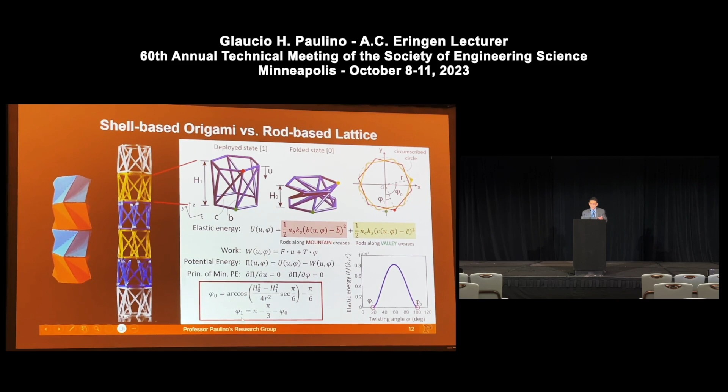When I plot this energy versus the twist angle, we can see the stable configurations are here, and the energy is 0 at this minimum point. But when I talk about frustrated states later in the talk, halfway through, we'll have frustration and pre-stressing in the system, and the energy level at the minimum points will not be 0. We can do calculations and find what these angles are, as shown here.

Then we can program the instability by playing with geometry and material — sometimes we don't even know the difference between geometry and material. We can see here that we can play with the Kresling pattern in terms of polygons that have 4 edges, 5, 6, and so on.

To make this like Legos so you can play with it, we put small magnets here so they can easily connect to each other. When I put them together, they have to satisfy this compatibility condition so each piece can be assembled. If we look at the energy versus the twist angle, we can see that the lower the number of edges, the higher the energy barrier.

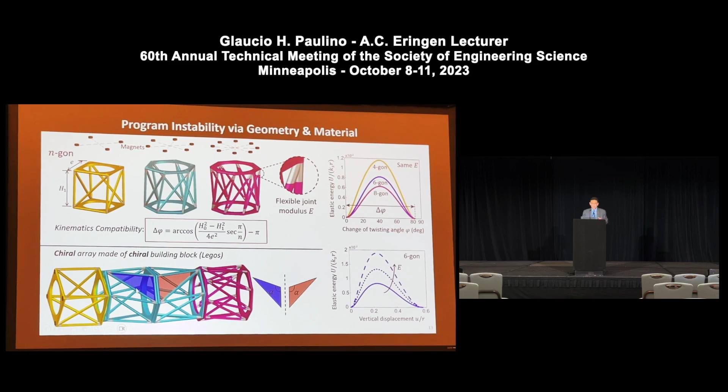And if I keep the geometry and use stiffer materials, then I have a higher energy barrier. And when I put them together, I always make sure that when they are joined, I have opposite chiralities, as you can see here.

We designed this using a gradient-based min-max topology optimization, and the objective shown here is the minimization of this quadratic function, where we minimize the difference between the desired state and the calculated state. The design variables are the cross-sectional areas we are going to design, and we have a volume constraint.

In general, most topology optimization work, and Professor Wei Chen has contributed a lot in the field, is based on density-based methods. But here, since we are using a rod-based method, we did this using a ground structure method. Essentially, we have a design domain with many points, and we connect each point with every other point and have a truss member there.

Then the optimizer will remove most of them, almost all of them are not needed. The optimizer will remove almost 100% of them, 90+%, and at the end, if things work, I will get a configuration like this that will work.

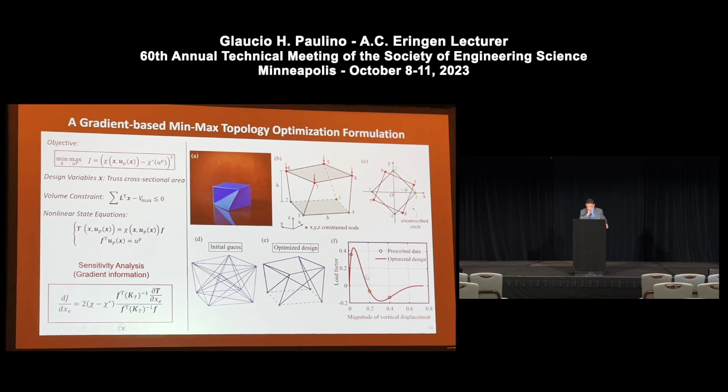And essentially this min-max configuration is done by means of some prescribed data, prescribed behavior that I want. I want to program the material to behave that way with these points, and then the optimizer is going to give me a potential result that will have this nonlinear behavior that I'm looking for.

And then I can play with geometry and material. For example, here I'll keep the material the same, just change the geometry. The first two here have 8 sides, then 6, then 4. Just remember, the lower the number of edges, the higher the energy barrier. Therefore, the middle is going to buckle first, as you can see here.

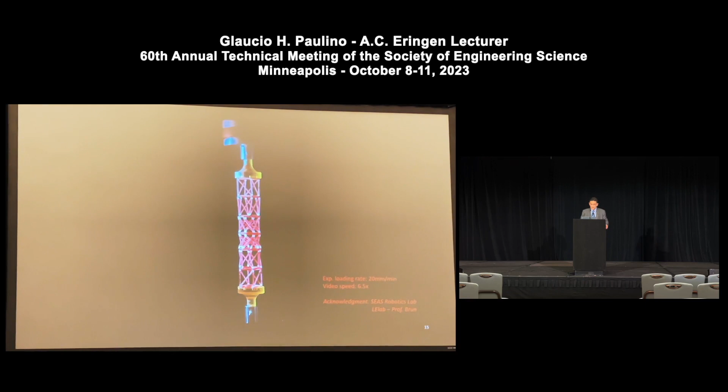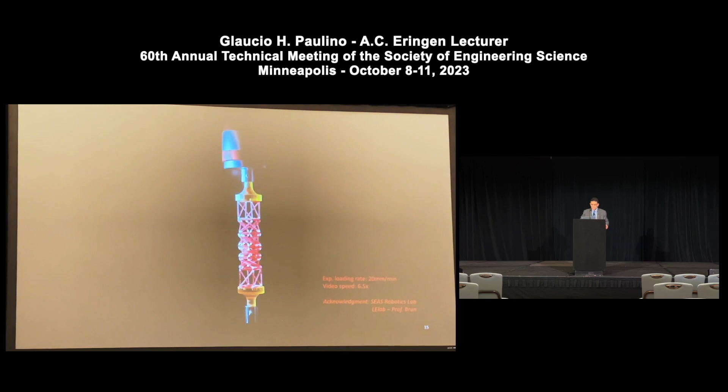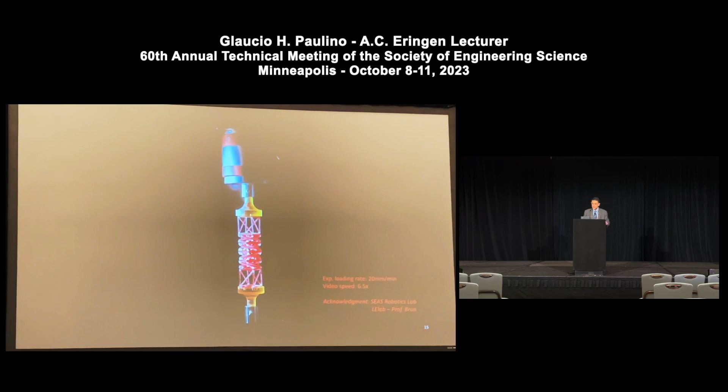And then the next two, that are the 6-gons. And finally, the 4-gons. So here, the material is the same — we just played with the geometry.

And then now I can keep the geometry the same, for example, and use different materials. And then I can design different load displacement landscapes and different multi-stability configurations, as you can see here.

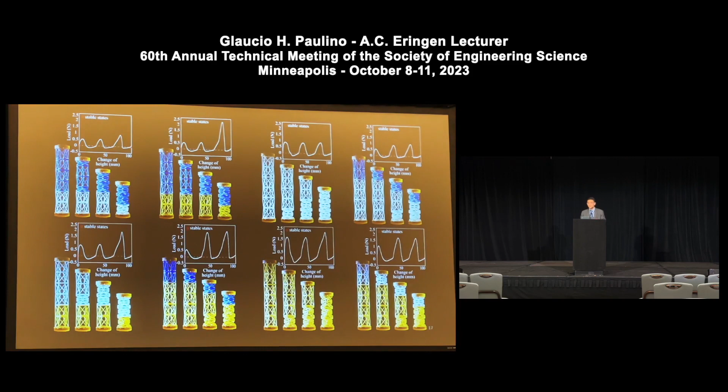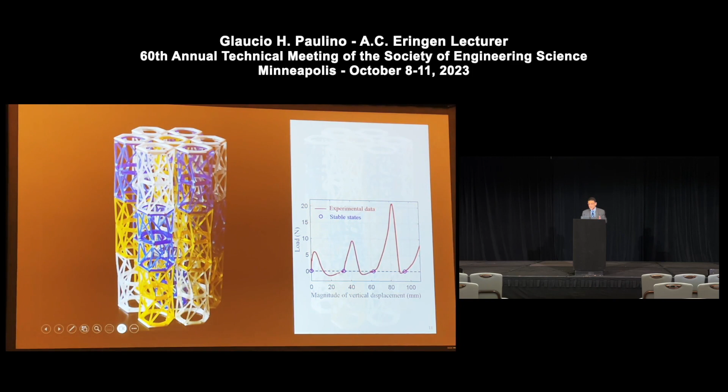But everything here is 1D. If we are claiming there is metamaterials in the title, then the materials have to have a three-dimensional feature, and then we can assemble this, for example, in 3D, as you can see here, and we would get some multi-stable behavior, as you can see on the right.

And here, what happened is we have three colors, three different materials. The blue is the less stiff one, then the white, and the yellow. Doesn't matter where I put them — you are going to see that first the blue will be activated, and the others wait, and then after the blue finishes its job, we go to the next one.

And then you can change this as you wish. Actually, when children come to our lab and play with this, they love it because it's very nice to play with this.

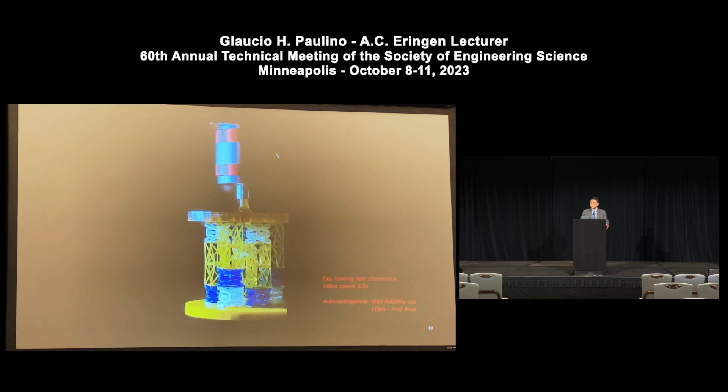Origami is good for everybody, not just us — children, adults, and also it's very good for me because when I retire, then I will have something to do.

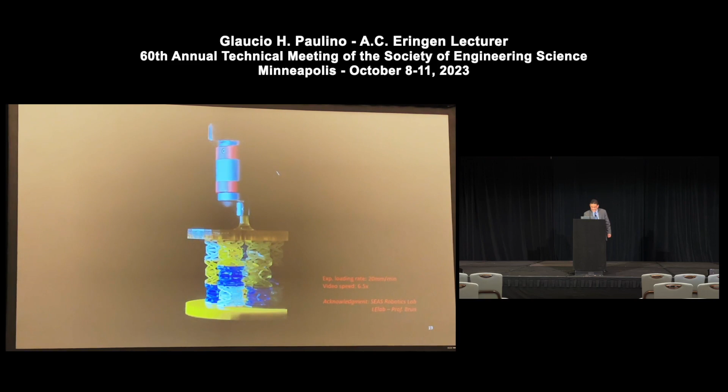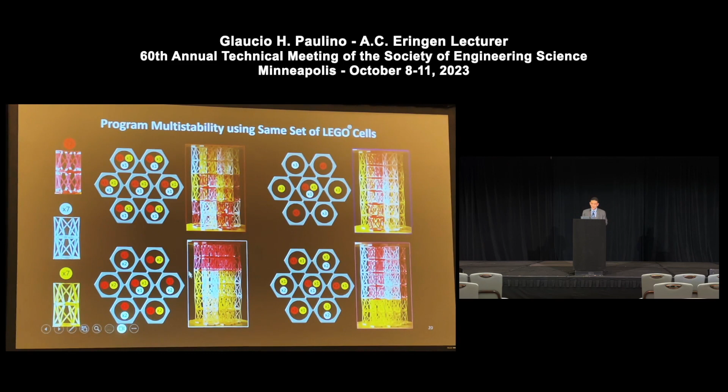As I said, you can play with this and give this to children, and we have lots of Legos here, and we just distribute them as shown here. And then how do you play with this? Let's see the first one.

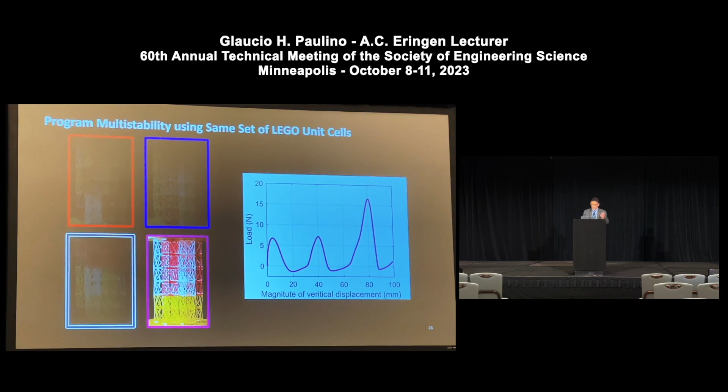Then you can see that we get more or less an ascending peak loads, right? It is multi-stable behavior. The next one, for example, I may want all the peak loads to be the same. This one, a small one and two big ones, or the opposite, and so on. And this is a work in progress, unpublished, but I decided to share this with you.

And then now let's continue on the origami-inspired metamaterials. I have talked to you about this rod-based origami. Now I'll talk about origami that is based on shells, and I would like to concentrate on this work.

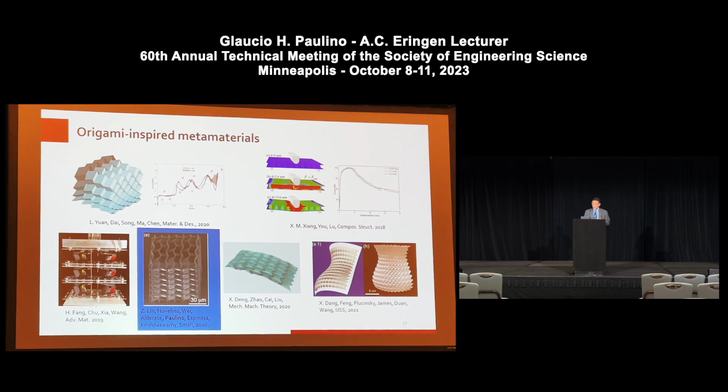That I did in collaboration with Professor Horacio Espinosa and collaborators. We wanted to go in lower scales with the origami and see how it behaves, and then we decided to study the micro-scale origami architected metamaterials exhibiting macro-scale reversible auxeticity.

We can see here, for example, we can have some Miura strips, and I put two Miura strips together to form a tube, and then I can go and assemble these tubes as shown here. If I align them in this direction in a special configuration called a zipper type configuration, this metamaterial has very special properties.

We investigated this at the macro scale, and the key idea was to try to do this at the micro scale. The whole thing is about 30 microns, and the metamaterial may be around 100 microns or so. The features are quite small: the platelets are about 13 microns, and the thickness is about 1 micron or so. At the time we published this, this was probably the smallest origami metamaterial that had been done.

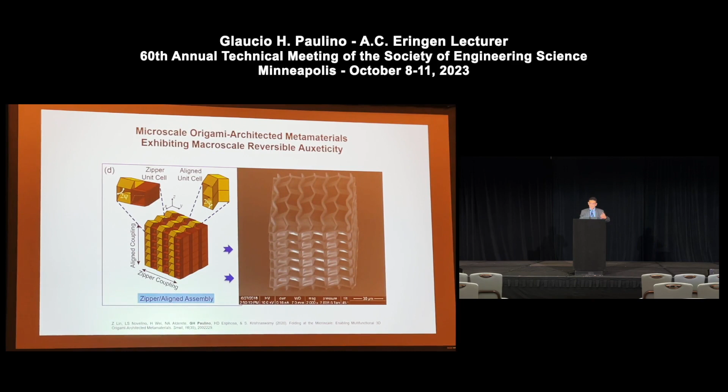One contrast I would like to make is that most metamaterials are many times lattice-based, but this one is based on shells. Everything here is made by this shell arrangement.

Horacio gave a talk and talked in very detail about this work in the Eringen symposium. I'll just highlight a few things.

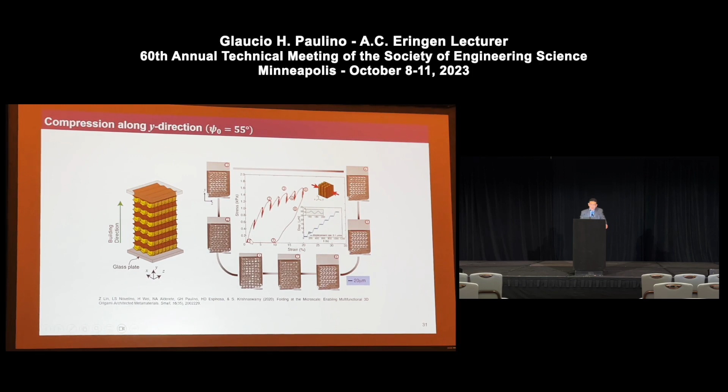If we do the same in situ SEM test but just change the orientation, testing it in the Y direction, now you can see we have just a hardening behavior. But again, when I unload, the same behavior - you can see it start at 1. If you look at 5, this has deformed a lot, but when we unload and wait a little bit, the material almost recovers completely. That's very nice.

All the details of this work are in this paper that we published in Small, and I refer you to the paper, and I'll be glad to talk more to you about this work.

So far I have talked about rod-based origami, shell-based rod-based, the cylindrical type that can be assembled in 3D, and talked about metamaterials that are a combination of tubes and assembly of tubes. Now, for the remainder of the talk, I would like to talk about tessellations.

These two have some very peculiar behavior. For example, here is the Miura ori, and in plane it has a negative Poisson ratio - you shrink in one direction, you shrink in all directions. Out of plane, it forms a saddle type configuration, and the egg box is the opposite. In plane it has a positive Poisson ratio like most materials, but out of plane it has a negative Poisson ratio, and forms this dome shape that is typical of auxetic materials.

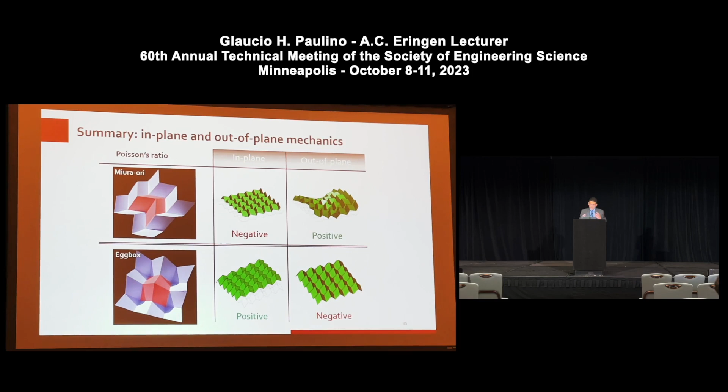As you can see, these tessellations are very beautiful. They have a lot of features, symmetries, anti-symmetries, and a lot of behavior associated to their geometry and periodicity. Several groups have studied these tessellations and noticed a tremendous elegance in the geometric mechanics of the origami. For example, the group at Harvard, the Mahadevan's group, studied the Miura pattern some time ago and parameterized it, as you see here.

After a lot of math and derivations, they computed the Poisson ratio in bending, and then the Poisson ratio in stretch. If you just take a look here, they are identical, except for the sign. One is the opposite of the other.

Later, a group in France studied the egg box, and after a lot of math, in a very long paper, they were able to derive analytical expressions based on the parametrization of the egg box for the Poisson ratio in bending and in stretch. Take a look, very elegant, very interesting. They are identical except for the sign.

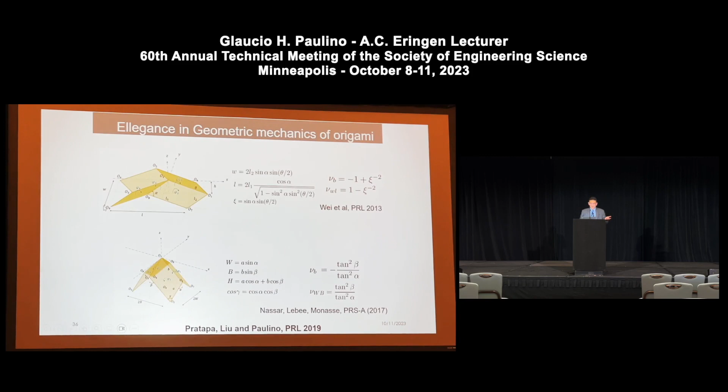Later we also studied some of these patterns, but one thing you see is that Miura is Miura, egg box is egg box, right? These are two different materials. Wouldn't it be nice if we could have both, since they are so opposite of the spectrum? As Professor Eringen agreed, most materials would have behavior that is a combination of both. Wouldn't it be nice if we could have these two material configurations in the same material system? And if I am asking the question here, it's because the answer is yes, and that's what we did.

With the morph pattern, for example, here's the same material. I embedded, encoded all the unit cells with the Miura mode, and then you can see it has exactly the same behavior as the actual Miura.

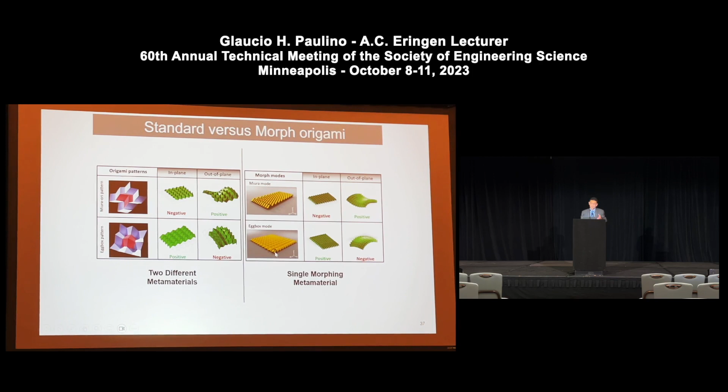And then here I change. Here's the same tessellation, just change the encoding to be egg box, and then you can see it has the expected behavior.

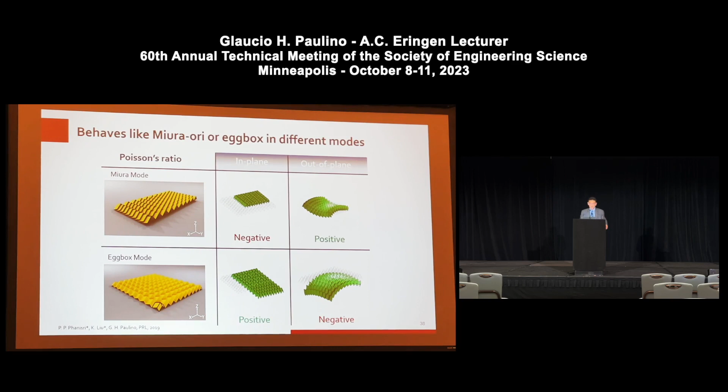And here is our new metamaterial, just changing the encoding, the same material system, and you can see that the behavior is exactly what we anticipated. Now we have this metamaterial with the possibility to encode both modes, either a Miura or an eggbox mode. How do we do that? I will explain in a second.

We also did a lot of work to understand how this behaves, especially about the Poisson ratio. As you define the Poisson ratio in stretch as the negative of the stretch ratios, in bending we do the same. We define the Poisson ratio in bending as the negative of the curvatures in the two directions, as I am showing here.

After you do all the derivations, we got this Poisson ratio in bending, given by this expression. And you can see the expression is beautiful. Even if you don't know what the result is, because the tessellation is so beautiful, the result has to be beautiful. You can see there is some symmetry in the expressions here, especially, for example, the terms in parentheses and so on.

And then we did the derivation in stretch, and take a look, they are very elegant, very beautiful. The only difference between the two is the sign. And then we have this beautiful property.

And we can also show that the previous derivations for the eggbox and the Miura become particular cases of our general expression.

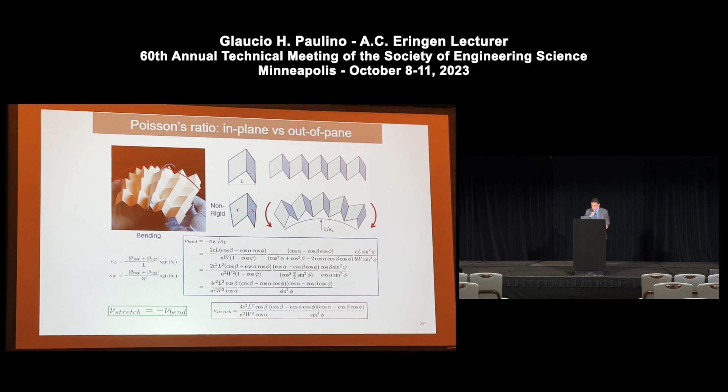All these ideas are summarized in this paper we wrote in PRL on the geometric mechanics of origami patterns exhibiting Poisson's ratio switch by breaking mountain and valley assignment. We started here a mathematical framework to describe the origami that recently we were able to generalize in this paper in PNAS, published last year, showing that discrete symmetries control geometric mechanics in parallelogram-based origami.

What I find interesting here is that we use a theory that uses the features of the origami itself. If you use a general method to analyze origami, like finite elements, it has no idea that what you are analyzing is an origami. But here, the mathematical framework is composed of vertex operators, edge operators, panel operators that are intrinsic to that geometry, which will allow us to understand the geometric mechanics of the pattern.

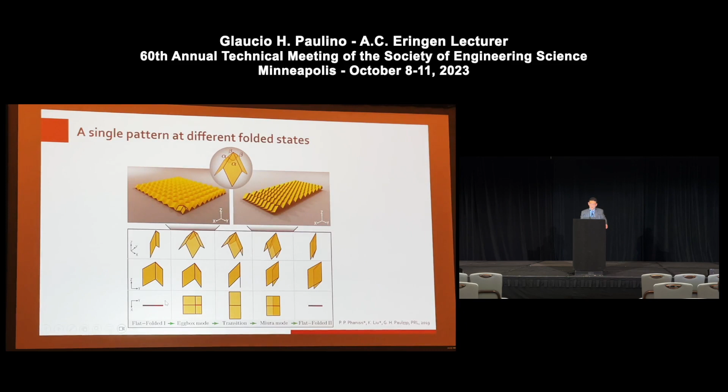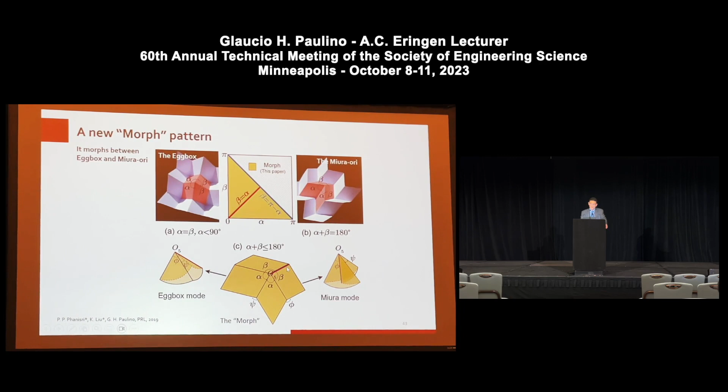When we compare the behavior, this is well known from work of previous colleagues: looking at the egg box versus the phi angle, in general we look at these angles, psi and phi, which is this angle parallel to this crease that will change the mountain-valley assignment.

We know that the Poisson ratio is positive for the egg box - this is not our work, this is from the literature. And for the Miura, we know the Poisson ratio is negative, again this is from the literature. But the morph, something very interesting we see, is that it can change this Poisson ratio from negative to zero to positive. That's what the theory showed.

Is this true? The only way to see that is by means of experiments, and we are going to verify that later on.

Now let's look at the configurational space of the morph, using this terminology. The gammas are the dihedral angles, and you look at the psi and the phi angles, and the panel angles are alpha and beta. The angle shown here is the same for each parallelogram close to the vertex: this is alpha, this is beta, this is beta, this is alpha.

Then I can derive the configuration space, do some derivatives, and use spherical trigonometry to show in this psi-phi configuration space that the corresponding configuration at the peak - this gray line you see in the psi-phi curve - is the transition state that corresponds to gamma 3 equals 0, when we can flip from mountain to valley and vice versa. That will change the properties of the material tremendously. You can see that when this term is 0, then this will be 0 as well, because this term will be 0.

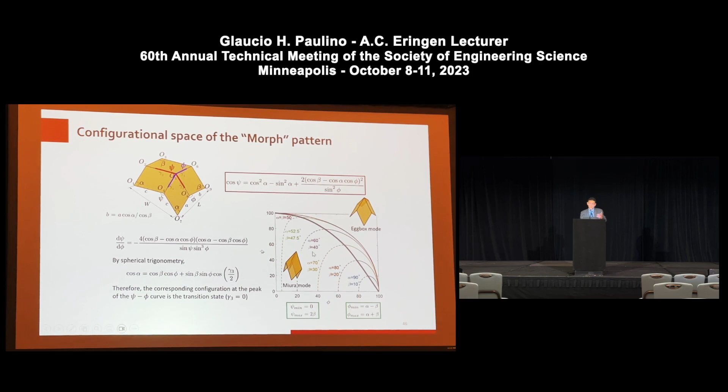Here I'm plotting several configurations where to the right, the pattern will be in the egg box mode, to the left in the Miura mode, and I chose here alpha plus beta to be 100 degrees - these are the configurations we get.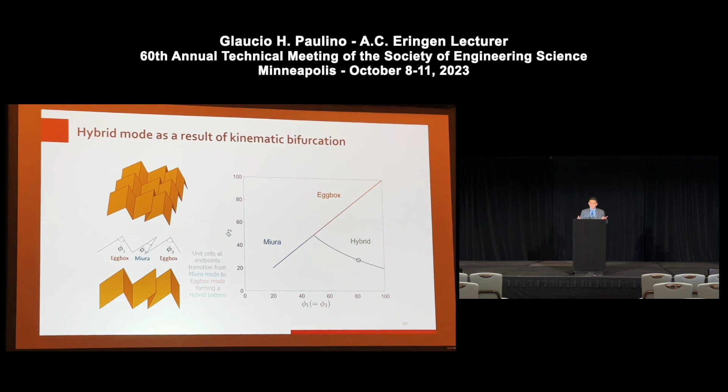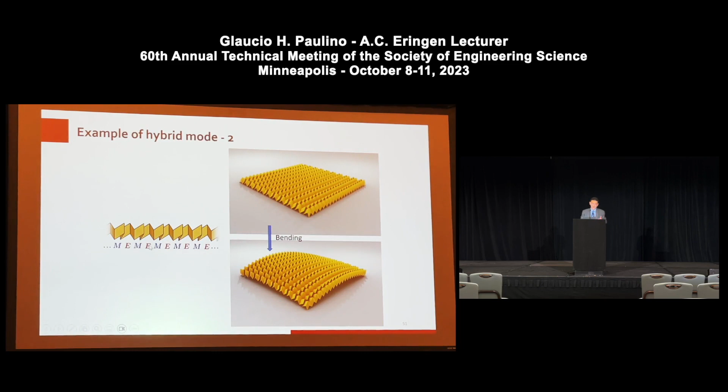And then I can use this any way I wish. For example, I can encode half of the tessellation with a Miura, half with the egg box when it bends - this part bends more or less like an egg box, this bends more or less like a Miura, but this is the morph pattern. Or I can alternate the encoding or do it any other way I wish.

Now, does that theory make sense? Is that true? We did some experiments with a 1 millimeter thick polypropylene sheet that was milled with a CNC machine. You can see here the size of the tessellation, and here you can see the units of the pattern, and this has to be done with extreme care.

Origami is wonderful, it's great, but it's very unforgiving. Anyone who works here in origami, I think, would agree with me. It's very unforgiving. If you do things very precisely, the key word is precision - things in general work very well, but if you sacrifice precision, then you pay the price.

However, when we do testing, what happens is we can only do a finite size, and when we pull on this, we always get this dog bone shape, which is a non-uniform transverse deformation that pollutes the results. The question is, we want to have a uniform transverse deformation and no dog bone shape.

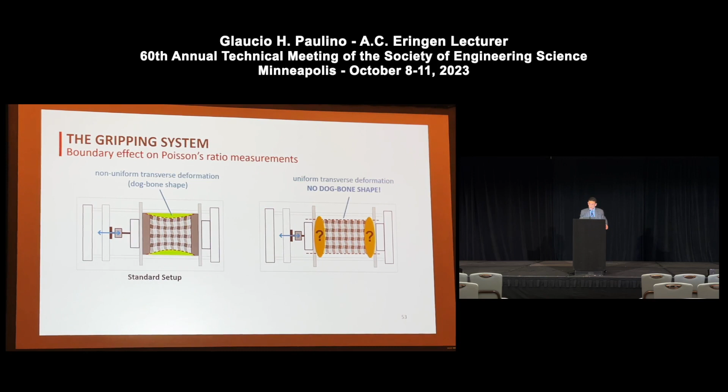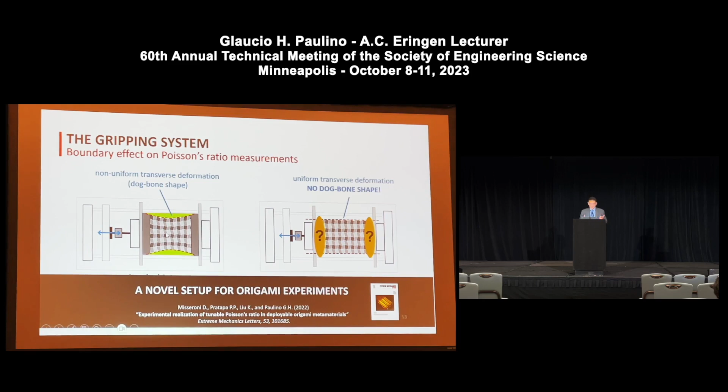If you use standard fixtures, then when you do the experiment, things may jump and the results may not be as clean. So let's see how this behaves.

Here I am going to start with this tessellation, and the notation I'll use is that the number of Miura cells is 0, so everyone is in the egg box mode. Here's the angle psi, and here is the test. Here is the observation region - it's like a digital image correlation type so that we can compute the Poisson ratio.

Take a look here. I have 3 results. First is the theory, the equation we derived - the Poisson ratio versus the angle psi. Next, we did numerical calculations using the Merlin software. Merlin is a software we developed some time ago to provide a fundamental framework to understand the nonlinear mechanics of non-rigid origami, and that's what we used here. The blue are the experiments.

These results use the new fixtures. The old fixtures would not provide this level of agreement.

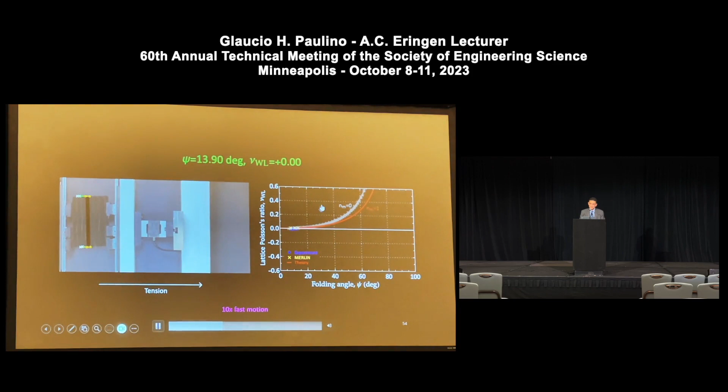Next, what I am going to do is encode just one layer of Miura cells. Now, as you know, the Miura has a negative Poisson ratio, so it tends to bring the results here to the right, as you can see. But this is the same tessellation, the same pattern being tested.

Now I am going to have 2 Miura unit cells, and something very interesting is going to happen. Take a look - these are 2, and there is only 1 row with the egg box. What you can see is that it has a nearly 0 Poisson ratio for almost a huge range of this angle psi, this folding angle. And then later it will become negative.

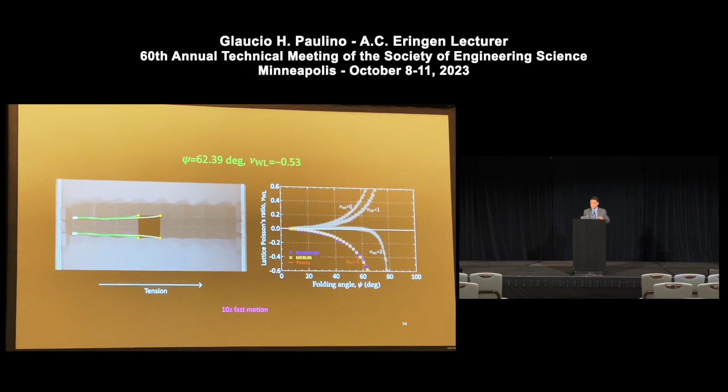Finally, we switch and have everyone in the Miura mode, as you can see here. In the interest of time, I'll just show you the final result - all the results agree quite well between experiment, simulation, and theory, as you change from positive to 0 to negative, the same tessellation.

All right, and here are some of the load-displacement results. And now the key idea is...

Here we have a homogeneous sample on the left, and then with the morph, for example, we can create a line defect type. But the question is, can we have defects in multiple directions, like line and point defects? With the morph, we can only achieve this level, and the answer is yes - this is summarized in this paper we published in Advanced Materials.

Here is the idea of the pattern. Again, going back to the Miura, it has a lattice in the orthogonal space - this angle is 90 degrees, angles alpha and pi minus alpha. Here is the egg box - all the angles are alpha, again an orthogonal lattice. But the trimorph is the new pattern we developed, and it is not in an orthogonal lattice. This is the key to getting the features we are looking for.

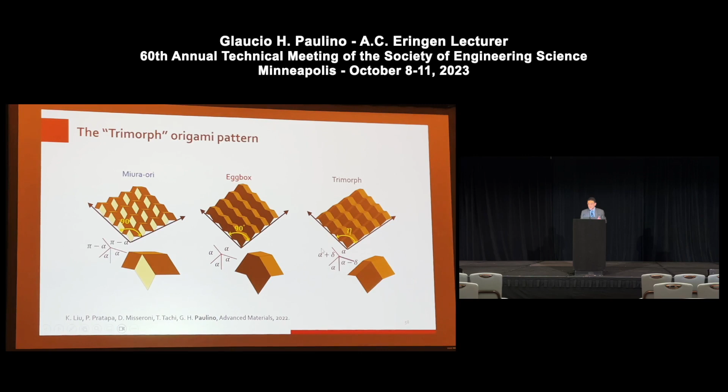And the angles are alpha, see? And here is alpha plus delta, alpha minus delta. Let's see how this works.

Here is the schematic of the pattern. Notation is similar to before, but now because the pattern is more involved, I color-coded the 4 panels. And as you can see, these two angles here are alpha of the blue and the green, this is alpha plus delta, alpha minus delta, and these angles are the same at the vertex of the pattern.

And then I have here my configuration space, and I can derive this, given again by this very beautiful expression. The coefficients D, E, and so on are given in terms of these psi and phi angles, and alpha and delta angles. Just remember this is in triclinic space, so these angles are not necessarily 90 degrees.

Here is the pattern in a Cartesian frame. Now let's quickly look at the configuration space of the trimorph cell, again looking at these psi versus phi angles. And now I have 7 configurations here.

And the color coding is very helpful, and you can see something very interesting. I start here in configuration 1, in a certain type of Miura that we call Miura type 1, and there will be a transition phase here, 3, that transitions to an egg box, and again there will be another transition here, 5, transitioning to another type of Miura. Also notice there's a beautiful configuration space, but notice here that 1 and 7 seem to be at the same location, but there is a discontinuity.

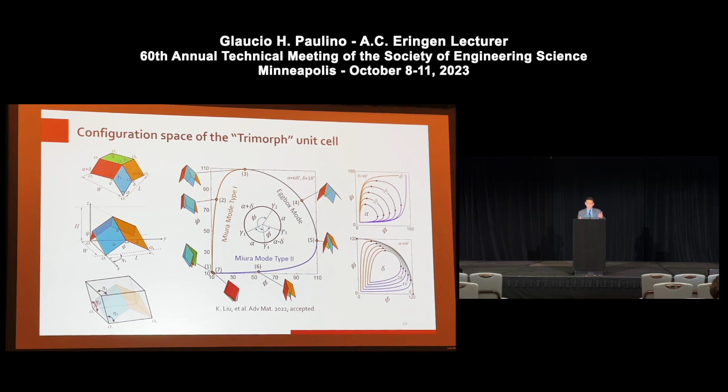And then, when I vary the angle delta, again this angle here is the panel angle, and I can choose that. Then you can see that we start with a pure egg box mode - there is no yellow, no green here at this endpoint. And then when I keep changing this angle delta, the other two Miura type modes appear. So it morphs from a pure egg box mode to another mode with two Miura modes and another egg box.

This here is an illustration of the 3 unit cells that give different behavior of the tessellation. Here are the spherical polygons, which we can derive using spherical trigonometry, and here are the Gauss maps. What's very interesting is that in general, the Gauss map of a Miura is a bow tie, but you can see the two of them have completely different orientations, and the Gauss map of the egg box is a spherical polygon.

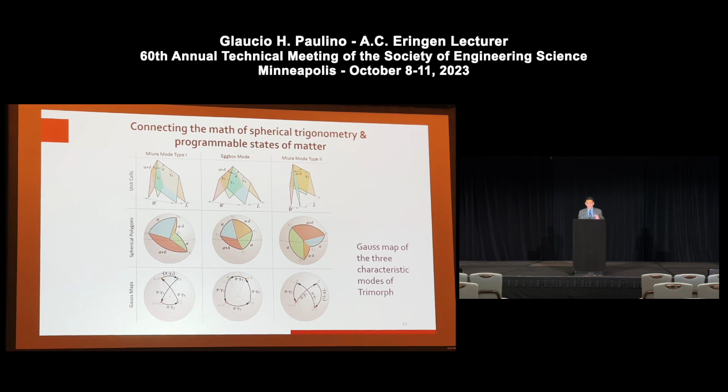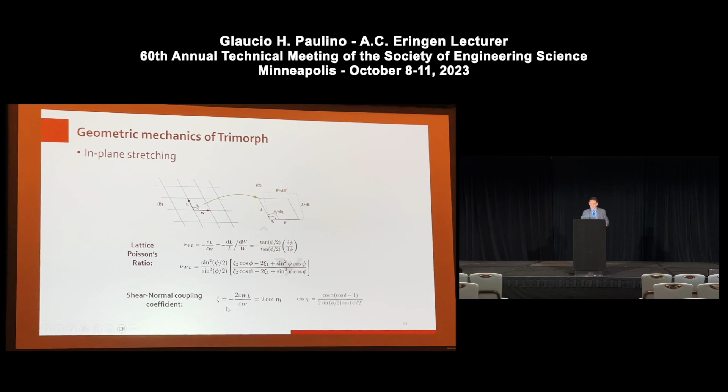That's what we get here. The interesting thing is that this allows us to connect the mathematics of spherical trigonometry with this programmable state of matter, so it can allow us to program the material. Again, we did similar math to what we showed before, so we could calculate analytically the lattice Poisson ratio, and because we are in triclinic space, we also look at the shear normal coupling - the negative of the ratio of the shear to the normal strains, given by this expression.

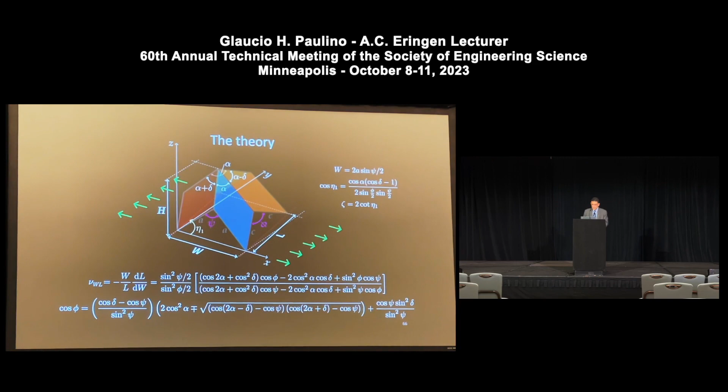Let's take a quick look at these experiments, and I'll try to speed up so we can have some time for questions.

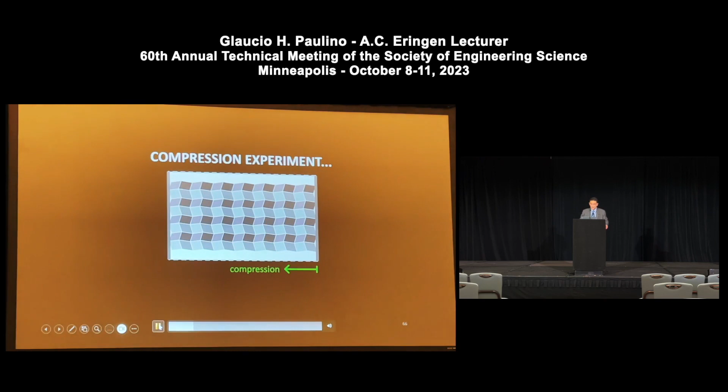Then we have this rail, the sliders, and the locking system, and this two-piece connector. These pieces are then connected properly to the tessellation, as you can see here. And like before, this is our observation region. I would like to show you the experiments here where we get the Poisson ratio that will switch from positive to negative, as you can see here. And here is in a kind of egg box mode.

Now it will become - you can see here the evolution of the experiment. Then it becomes 0, and then the Poisson ratio switches, and it becomes negative.

And we can also see the shear normal coupling evolution here. Now, using the same tessellation, we are just going to do the opposite tension, where the Poisson ratio will change from negative to positive. You can see here that the match between the experiments and the theory is pretty good and allows us to investigate this Poisson ratio switch.

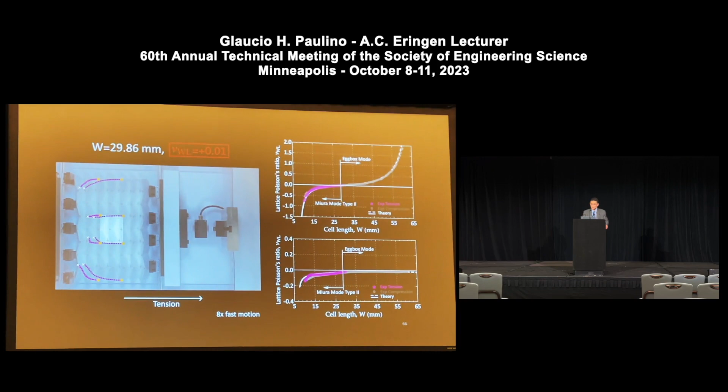Now let's talk about the importance of using frustration. Sometimes frustration is not good, especially in life. But sometimes frustration can be pretty good because it can allow us to design and reprogram materials. Changing the levels of frustration, we can change the material behavior.

What we decided to do here is, since everything I've shown recently is a degree-4 origami, 4 parallelogram, we decided to have 2 hinges with the same folding stiffness, and 2 that will be nearly 0. Then I have here the kinematic path, gamma 1, gamma 2, and the energy contour. When these coincide, we can look at the energy versus the dihedral angle gamma 3 of the tessellation, and this is one of the angles that can switch.

Then we can see the energy landscape here, and the theory is a quadratic energy function. This gamma 1 bar, gamma 2 bar, is the reference state, our neutral state. You can see here I have these points 1, 2, and 3. One thing you'll notice is that 1 and 3 are symmetric along this line, and 2 is at the 45-degree angle where gamma 1 equals gamma 2, which represents the egg box mode.

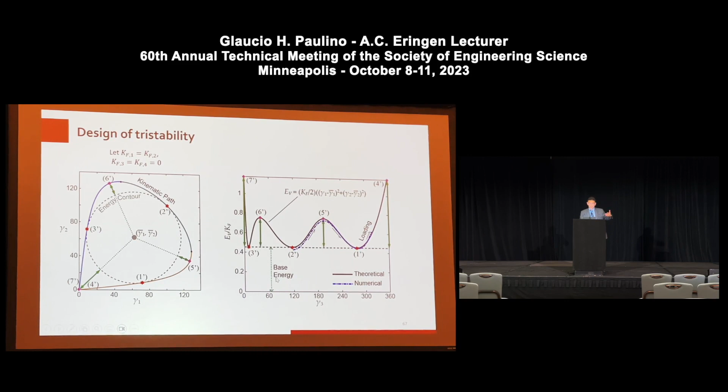Because this is a pre-stress system, there is a level of frustration. Notice that this is not like before. In the first few minutes, the energy for the minimum energy configuration was 0, but here it will always be finite. That will depend on the level of frustration in the tessellation.

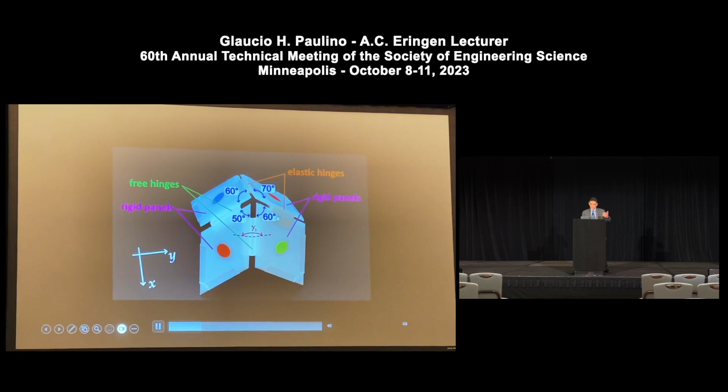And here is the way this was done. This will illustrate what I have just shown you. These here are the dihedral angles, these are the rigid panels, these are the elastic hinges that will impose the pre-stressing, and these are the free hinges.

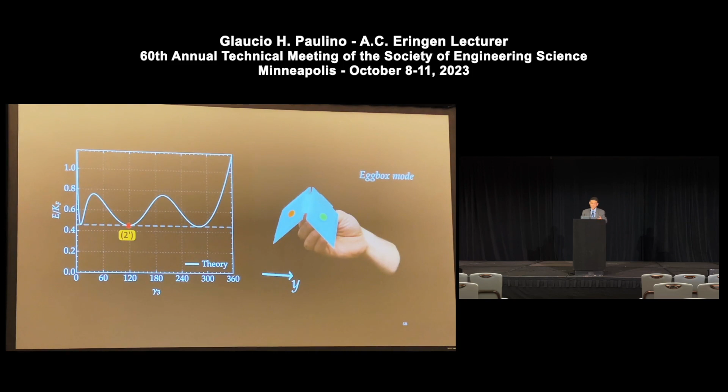And here I have 3 stable states, and you can even hear them. I'm changing from the egg box to 1 Miura mode, and then from the egg box to another Miura mode in the frustrated system. The tessellation is frustrated, or the unit cell is frustrated, and all the assemblies will be frustrated. This snapping behavior happens in the column behavior of the tessellation, as you can see here, the row behavior, as you can see here, and also in the assembly, the actual tessellation, as you can see here, and you can hear it.

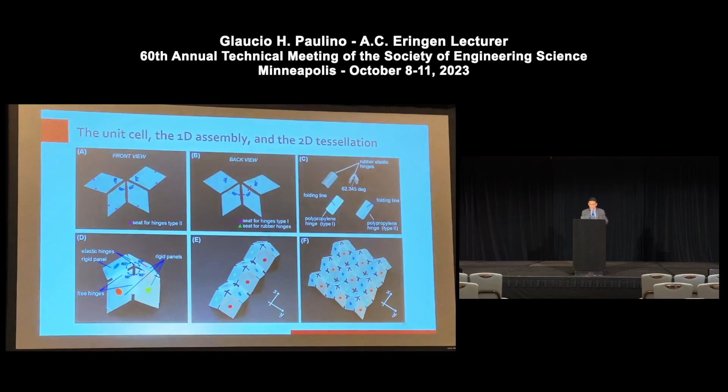Here is a summary of what I have shown, and finally we could achieve these non-rigid modes, and then we did simulations to understand this. In the interest of time, I will skip those, and then we went from the homogeneous state to a state with 1-line defect to 2-line defects, where we are going to have a point defect.

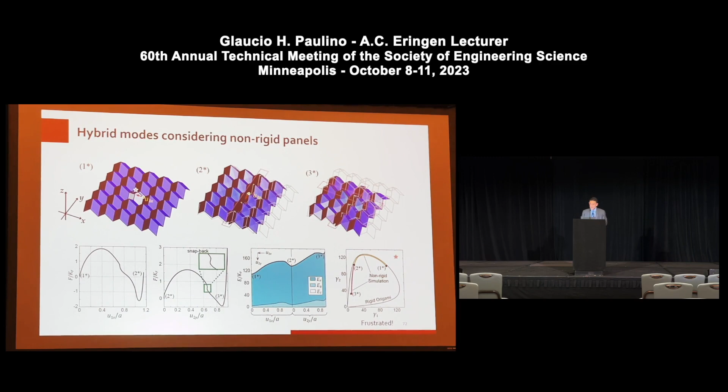However, when I start to create, for example, the point defects, then it becomes more and more non-rigid because of frustration that has been introduced in the system, and the system will have the defects, and the system becomes more and more non-rigid, as we can show here.

Finally, this summarizes everything, and after that I can answer questions.